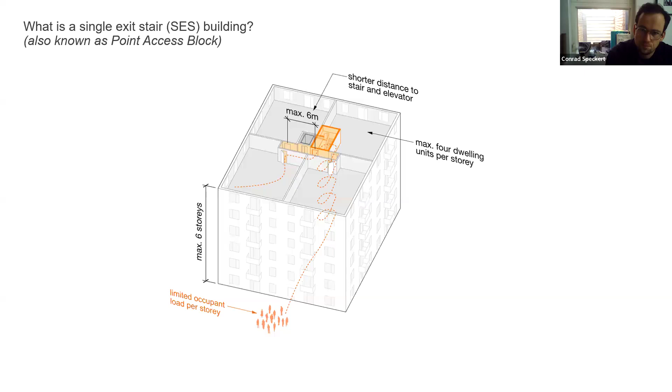When we compare that to what we typically see, I mean, I live in downtown Toronto, in the urban context across Canada. We're very familiar with the efficiency of a double-loaded corridor apartment building. Except for on the corners, the dwelling units in between are, we call them, shoe boxes. We've got borrowed light bedrooms, windows on one side, which leads to more reliance on mechanical ventilation, less daylighting.

The travel distance in that hallway can be up to 45 meters to one of the two exits. And other than exit capacity, there really is no limit on the number of dwelling units or occupant load on each floor.

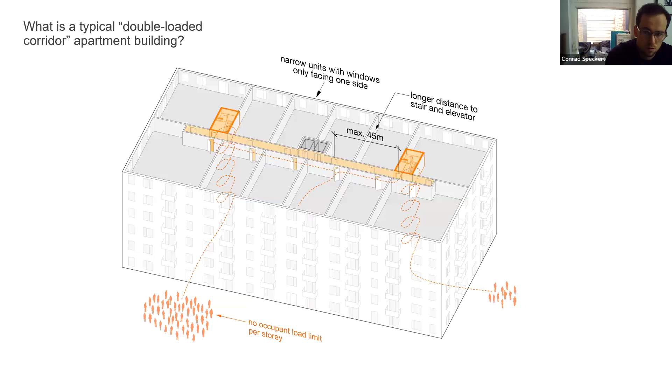And what is the goal of single stair design? So the way I see it is it's three parts and each one leads to the next. When we're talking about the missing middle topic, which I'm assuming all of you are familiar with and have heard ad nauseam, it obviously makes missing middle housing easier to build. That leads to making the development of smaller sites feasible, things like orphaned lots, narrow lots.

And that also changes not just what we build and how we build, but it changes who is building, because it enables development of small scale housing by people that we might call citizen developers. These are the types of developers that don't have the large amounts of capital and time that's required to go with land assembly and to pursue high-rise construction.

I could also add a fourth one to this, which is that it changes the carbon emissions profile, both embodied carbon and lifestyle carbon of the people living there, being in a more walkable community and building at a scale where light wood frame and mass timber construction is possible.

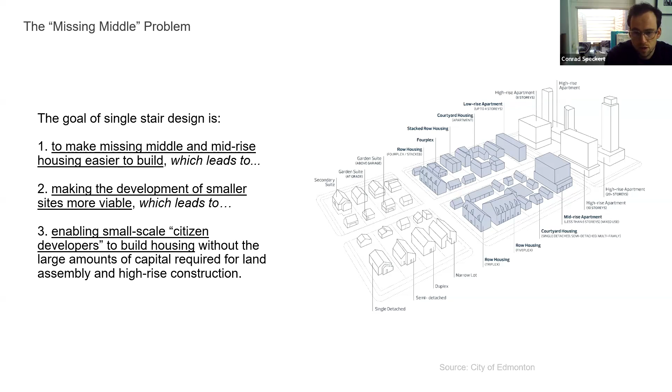Now, of course, one of the major concerns with single stair, and certainly as fire chiefs have described it as removing an exit, is the topic of safety, both fire and life safety in fire emergencies and all types of emergencies. We really have to understand what is permitted by the code, because as we know, in the context of alternative solutions, we're always comparing it to what the minimum level of performance is that's in the code.

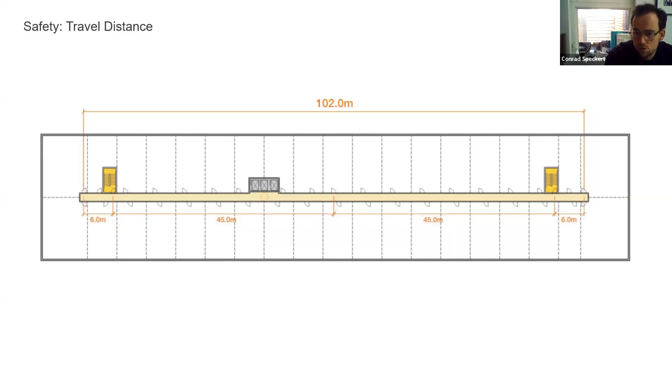And so this diagram, when you look at the variable of travel distance, tells you what the Canadian code determines to be safe. A 45-meter travel distance in a hallway with 6-meter dead ends means you could have a hallway that's up to 102 meters long. In the context of single stair, it would not be possible for the hallway to be more than 12 meters long.

Some Americans down south, realizing that they needed a visual, obviously related to sports, to communicate this concept, and maybe I'll make a version of it with a hockey rink, show the maximum permitted travel distances in the IBC compared to what's permitted in the Seattle Building Code.

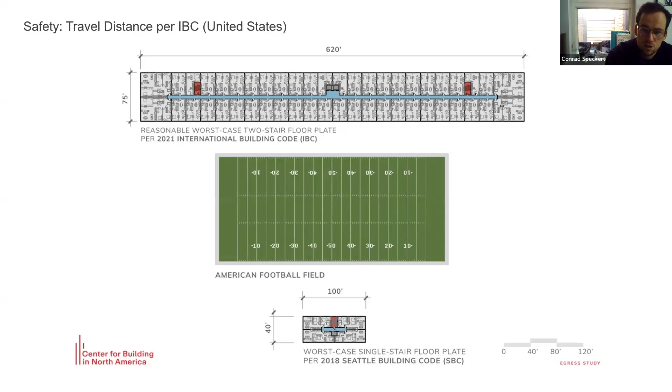And it's a pretty quick, easy way to understand the differences in probability of fires occurring, probability of what we call fire alarm fatigue, because fire alarms are going off often as a nuisance alarm and then people aren't responding to them, the number of kitchens on each floor, etc.

And when we turn to another variable of occupant load, number of dwelling units, the National Building Code tells us to consider occupant load on the basis of exit width. And so for those of you that are familiar with that calculation, in Part 3 of the code for buildings of 4 to 6 stories in height, the code allows you to have up to 275 people per story. That could be up to 137 bedrooms on that floor level, and that's per floor.

When we look at the context of single exit stair and the basis of the code change request that is being looked at the national level, and is similar to some changes I'll talk about in British Columbia and Vancouver, we're not talking about more than 30 people on each floor. And so cumulatively on the 5 upper floors of a 6-story building, that's 150 people. It's just over half of the number of people in the entire building as are permitted on a single story of a 2-staircase building.

And of course, we also are talking about limits on the number of dwelling units per floor, which inherently reduces the number of kitchens, the number of sources of fire ignition.

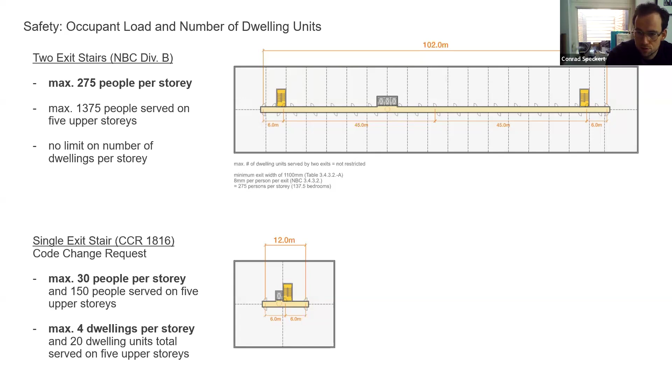But one of the interesting things is if you look at only occupant load and travel distance, you can end up with a very large building area. And so when we're talking about risk assessment and understanding single stair in the context of Canadian buildings of 4 to 6 stories in height, we're often also mindful of being agnostic to construction type. And so what that means is understanding things in the context of it being possible as non-combustible construction or combustible construction or mass timber. The lowest level of performance, of course, being a wood frame building.

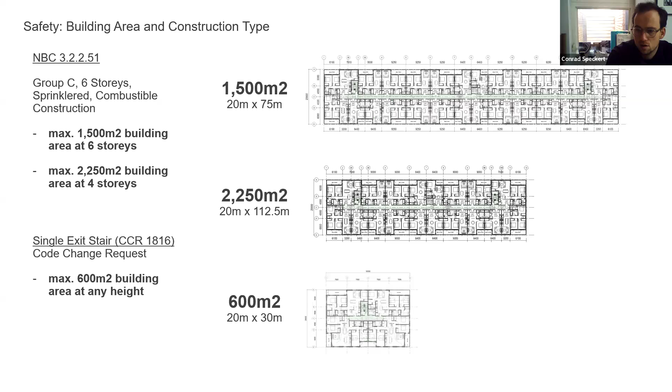Again, comparatively, when you're looking at a single stair building based on the work that's being done at the National Model Code level, it's being discussed at the scale of not more than 600 square meters. And 600 square meters is a very familiar number in the context of small buildings and small building areas.

And zooming out a bit from the numbers and the quantitative side, this is what's kind of interesting about single stairs. When we look at the context of apartment buildings in Canada and North America today, this is what they feel like. When we go into the building, we, from the lobby, see a row of elevators. We go up, we see a long hallway. The exit stairs are not used on a daily basis. The exit stairs tend to be unfamiliar until they're needed. And an apartment building typical floor is pretty indistinguishable from a hotel. So hope that gives a very quick introduction to single stair.

Now we're going to look at a bit of a history of this topic in Canada. So back in 1984, 2 architects put together a report for Canada Mortgage and Housing Corporation, which reviewed fire safety and the design of apartments. They looked at fire statistics in Sweden and Finland, apartment building designs in other parts of the world, what was in the US codes. And the report spoke to the topic of single exit stairs, something that they would recommend for work to be developed in the Canadian context. Of course, that was at a time when the number of apartment buildings we were building, the type of planning policies and land use permissions that existed was very different from today.

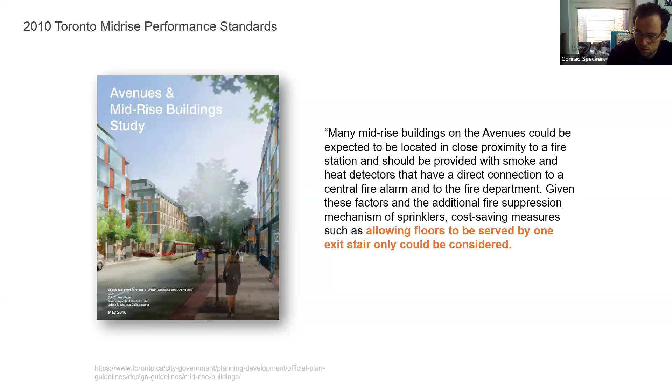More recently, in 2010, when the City of Toronto did its Avenues and Midrise Building Study, in the consultant's report to that, which Brook McIlroy Planning had worked on, there was a recommendation that for many of these buildings, there should be a consideration to allowing single exit stair design. The OAA also in 2019, as part of their report on housing affordability, fortunately only in italics, very faint text, mentioned potential changes to the Ontario Building Code to permit four-story buildings with a single exit.

And then most recently, the report of the Ontario Housing Affordability Task Force back in 2022. One of the items in that document was also to recommend allowing single stair buildings up to 4 stories. It is now 2026. There have not been any provincial consultations or reports published on this topic. And so it's interesting to see what was at least discussed back in 2022.

In other provinces, however, British Columbia moved quite quickly, some might say too quickly, on a process of changing their code in 2024 to allow buildings up to 6 stories.

Vancouver is an interesting case because Vancouver is a chartered city, so it has the ability to write bylaws that contravene provincial and federal legislation. And so Vancouver has its own building bylaw, essentially its own building code.

And Vancouver, on their own pace and with a very thorough consultation process, went and developed permissions for single stair buildings of up to 6 stories with requirements for the exit stair to be an exterior stair that's also protected from the accumulation of ice and snow. And really, it's an excellent solution to address smoke spread in the context of Vancouver's temperate climate.

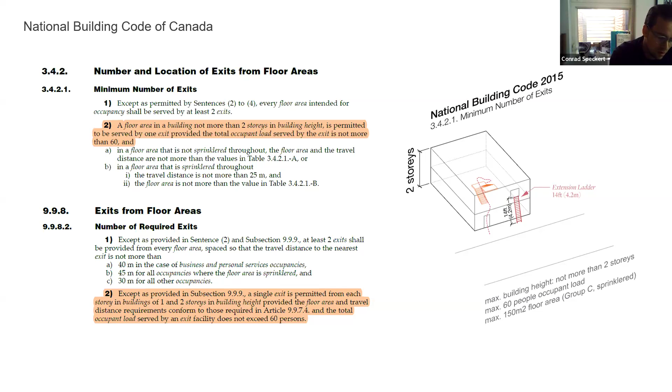And so the National Building Code, both in Part 3 and Part 9, state that a floor area in a building not more than 2 stories in height is permitted to be served by 1 exit, provided the total occupant load is not more than 60 people. As soon as you're over that occupant load, the travel distances, the floor area limits, and the 2-story building height, you're required to provide 2 exits. The only exception to that, of course, as many of us are familiar with, is stacked townhouses, where the staircase is internalized within a dwelling unit.

Just gonna take a sip of water here before I get into the nerdy part.

So, as many of you know, the Ontario Building Code has existed since the 1970s. The first edition of Canada's National Building Code was published in 1941. It was heavily based on a review of permissions in US codes and British codes and documents that were published at the turn of the 20th century.

And this is a very crude analysis, but it just looks at the page count of the PDF of the code. NRC has been very kind to put out an online version of every edition of the code. And what's been interesting is that since the early 2000s, essentially once we digitized things, the length of the PDF itself became not really a barrier to iteration of the code. And so it's on a trajectory towards increasing length and complexity, for better or worse.

Other codes in other jurisdictions put more of the rules and standards in technical guidance references. Some codes like the NFPA 5000 code break things out by occupancy category and building type. And so it's really impossible to make a statement broadly that building code length between different countries results in different outcomes. In every context, it's a different system.

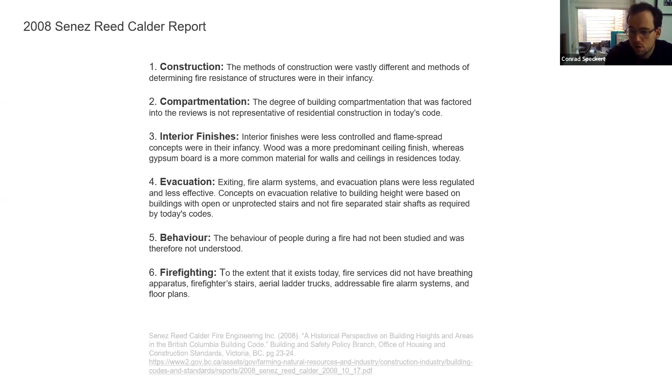So when we look at single stair specifically, back in 1941, the first edition of the code allowed 3 stories and 3,000 square feet in non-combustible construction to be served by a single exit. And this is the part where some architects might fall asleep, but it's just interesting to understand how the code has evolved over time on this topic, and also to understand that as things evolve, we are in a moment in time and the code will continue to evolve.

In 1953, the occupant load limit was introduced and the floor area was cut from 3,000 down to 1,000 square feet. In the 1960s, the code went through a process of developing principles. So principles for the design and means of egress were ingrained to state clearly, almost like what we have today with intent statements, what the intent behind it is.

And one of the principles is that in theory, for any position in a building which might be occupied, it should be possible to travel in 2 directions, since it is unlikely that both will be cut off at once. Ideally, therefore, corridors should have exits at both ends. Now, of course, practically, we have permissions in the code for dead-end corridors. We have permissions in the code for dwelling units to be served by a single egress doorway. And so that principle applies under certain constraints.

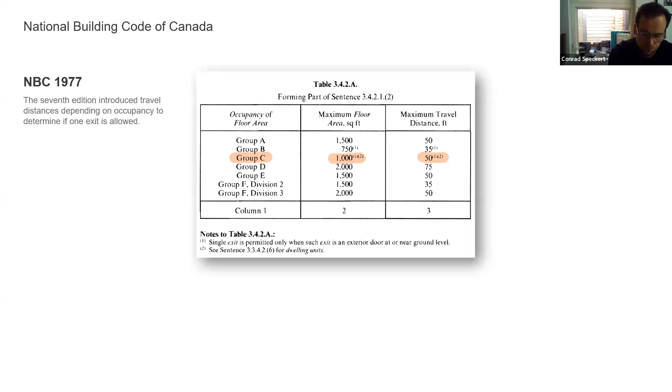In the 1970s, travel distance was introduced. In the 1980s, as a bit of urban infill development started to happen, the code started to develop permissions for 3-story townhouses. This is essentially when the stacked townhouse was invented, because it codified permission for 3-story townhouses with balconies not more than 6 meters above ground level. The code also clarified in the 1980 code that dwelling units in buildings up to 3 stories don't need to have a corridor fire separation, so that the dwelling unit is permitted to open directly into an exit, so long as it has a separate means of egress.

The 11th edition in 1995 subdivided between sprinklered and non-sprinklered floor areas. That's also the year that the national code required sprinklers in any building above 3 stories, something that was later brought into the Ontario Code in 2010. And in 2005, the entire code system went through a process of going from a purely prescriptive code to an objective-based code, which would enable the use of what previously was called equivalencies, now talking about them as alternative solutions, to demonstrate objective-based code compliance. It's not quite the same thing as a performance-based code, but it's a stepping stone towards a performance-based code.

And when we look at the functional statements and objectives, which is always key when you're doing an alternative solution, we can see that the intent is always to limit the probability. To limit the probability relates to risk. Due to hazards caused by persons being delayed in or impeded from moving to a safe place during an emergency, due to risks caused by fire or explosion impacting areas beyond its point of origin, both in terms of persons in or adjacent to the building, but also the building itself. So both property and life.

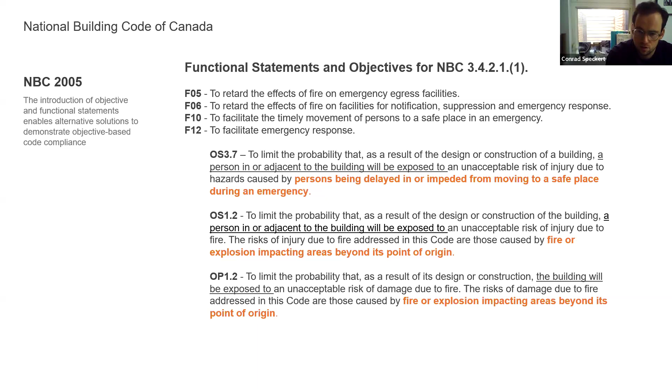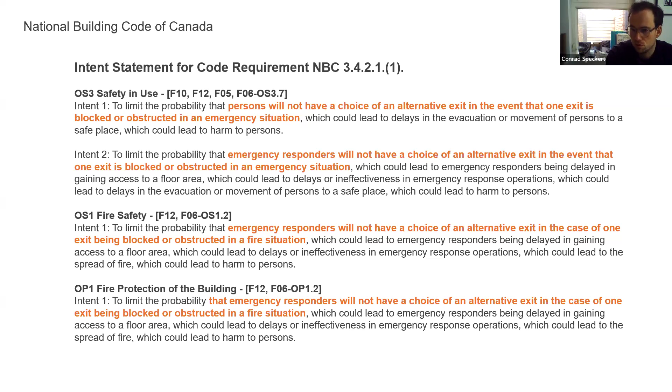What's interesting, of course, is the intent statements that relate to the prescriptive requirement tell us why there was a requirement for 2 exits: to limit the probability that persons will not have a choice of an alternative exit. In each case, that's restated, alternative exit. Of course, the intent statement describes the prescriptive requirement, but the intent statement is not a requirement for an alternative solution, and that's an important distinction to make.

What's also helpful is if we look at some of the other intent statements in the code for permissions where you're allowed to have a single exit, it refers to them as on the basis that the floor area has a limited occupant load, restricted area, and travel distance. And so it's establishing the type of criteria and variables that one should be looking at when one is considering a single exit.

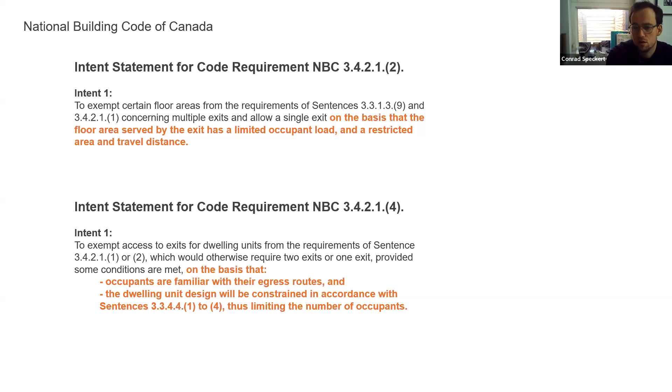Another one also states that single exits would be permitted on the basis that occupants are familiar with their egress routes. Right, so distinguishing between residential buildings like hotels versus dwelling unit apartment buildings. And also speaking to the dwelling unit design itself being constrained, and that's limiting the number of occupants. And so if we constrain the size of a dwelling unit, the travel distances inside a dwelling unit, which the code otherwise does not, that's another piece that the code already speaks to as it relates to the intent. So that's a quick introduction to the history of the code, history of single stair in Canada.

Now we're gonna step out of the country for a second. We'll jump to a few other continents, and then we'll also look south of the border for a bit. So some of you have seen this document. This was some of the work that I was involved in with McGill University, where we look purely at building height prescriptive permissions in codes worldwide. So every available building code that we could source, asking what is the maximum permitted building height for an apartment building with a single exit stair.

Now, one of the criticisms that's very valid of this document is that it doesn't tell you if the buildings are sprinklered, what the construction types are, what the number of dwelling units permitted per story is, all the other variables. It just speaks to building height. And what's interesting is that there's a large convergence of countries that allow mid-rise, 4 to 8 story buildings with a single exit stair. And with the exception of Uganda, Pakistan, and the city of Chicago, Canada is the most restrictive jurisdiction in the entire world.

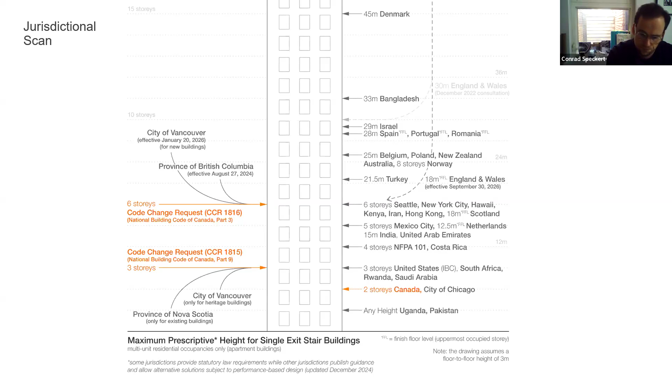There are also some countries, Switzerland, South Korea, and Japan, that have no maximum building height, but simply define the horizontal constraints and permissions as the building height increases.

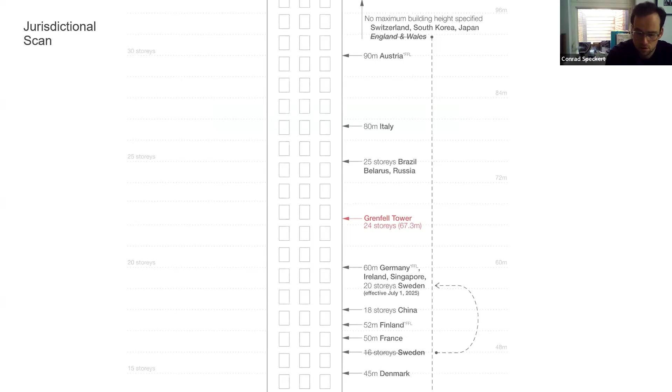Now, one of the ones you'll see on here, of course, is the Grenfell Tower. Many people will mention the Grenfell Tower disaster as a reason to be concerned about single exit stair buildings. For those of you that aren't familiar, the Grenfell Tower is an apartment building that in 2017 was engulfed by the deadliest residential fire in the UK since the Second World War. It cost the lives of 72 people.

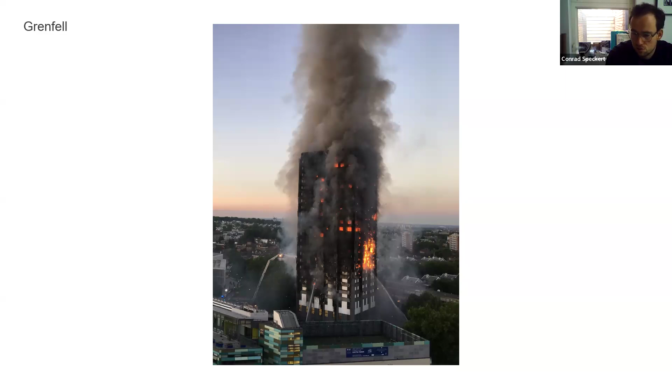High-rise buildings in the UK also have traditionally had a stay-in-place evacuation strategy, which meant that occupants don't evacuate when the fire alarm starts, but are instructed to stay in their unit, partly to avoid overwhelming and crowding the single stair. But in the case of Grenfell, the stay put order lasted for more than 80 minutes from the time of fire department arrival on scene before a general evacuation of the building.

Now, obviously, in a building of this height and scale, a second stair would have helped save lives, would have reduced the need for the stay put policy in the first place. But it's important to distinguish proportionality and that the scale of this building is not representative at all of what's being discussed in the North American context.

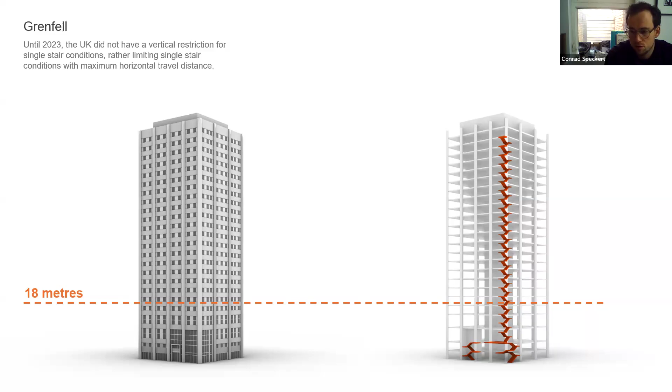And also in response to the Grenfell Tower disaster, the government announced new fire safety requirements applying to all new buildings, sprinklers being required above 11 meters in height, which is very similar to the 4-story context in Canada. And also introducing a maximum building height for single stair buildings in the UK now at effectively 18 meters.

Another jurisdiction that does a good job of diagramming and explaining the rationale and basis of their codes, being very technical and organized people, are the Germans. Germany introduces very clear proportionality and economies of scale for building requirements depending on building height. And so buildings of up to 7 meters, which is the uppermost floor level, so 3 stories, can have a single unprotected exit stair without corridor separation from adjacent floor areas. It also corresponds to the maximum ladder height of a ground ladder.

Once you're going up to 22 meters, the building can have a single unprotected stair, so no corridor separation, if the fire department has an aerial apparatus, there are no overhead utility lines, there's a parking space clearly designated for the building, and the fire department agrees to providing that second means of egress from the fire department ladder. Windows and balconies are placed and coordinated, and all of this is systematically designed for it, which is a fundamentally different context from how we build in North America.

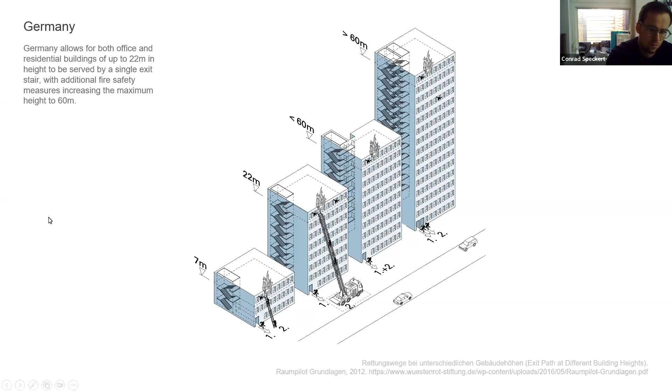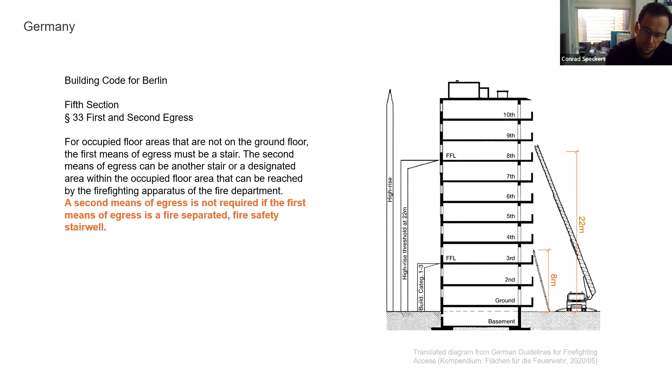And here's just another summary of that and a diagram of it in the context of Berlin. And so again, a second means of egress is not required if the first means of egress is what they call a Sicherheitstreppenraum, a fire-separated fire safety stairwell. Now, one of the examples of these buildings built in 2020 is a mass timber project in Berlin.

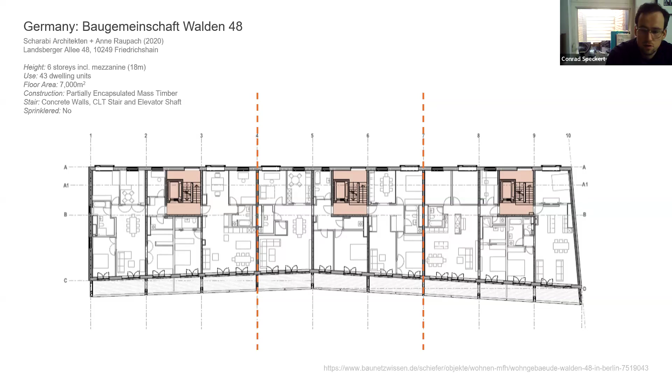What you'll see is there's actually 3 staircases. The building is essentially 3 small buildings separated into 2 dwelling units per story, each served by its own stair and elevator core. One thing I want to highlight is how narrow the building is. The units get daylight from both sides, cross ventilation, so it's quite a livable and desirable floor plan.

I also want to point out it's partially encapsulated mass timber. You can see that about 50% of the walls and ceiling are exposed. The building at 6 stories is not sprinklered, which again is a difference.

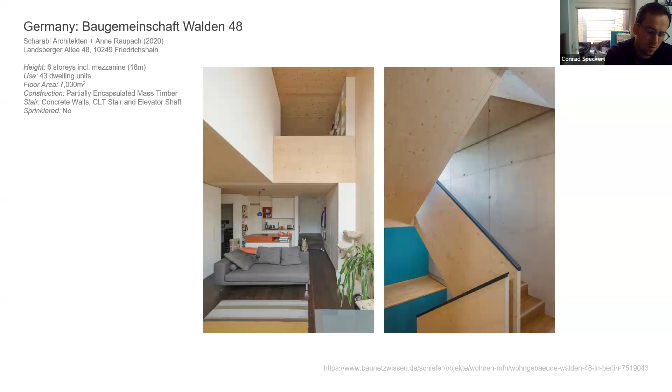Sometimes when we talk about single exit stair, it's pointed out, and it's very true, that in the European context buildings tend to be non-combustible construction, but that's also evolving. In the past few decades, codes around Europe have become performance-based, often agnostic to construction type. Last week I was in a presentation where a fire engineer from Sweden stated that at the mid-rise height, about 30% of their new housing apartment buildings are mass timber, even mass timber with wood frame combination buildings.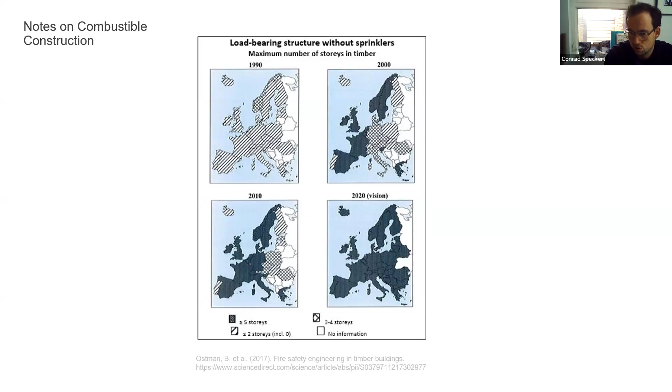And in many cases, at that mid-rise height, they're not sprinklered. Moving to the North American context, I think one reason other countries have flexibility in their code is because there's been a long history of building densely in urban environments. Perhaps one explanation for why we haven't allowed this in Canada is that we don't have a strong cultural and social acceptance of apartment buildings ideologically. The building code is a technical document, but it inevitably has a political underlayer, which is why there are various exemptions for houses.

Certain things tend to feed into it. But even in the North American context, cities in the United States have single stair permissions. New York City has been building this way since the 1930s, essentially since the very first edition of New York's codes. And Seattle developed conditions in the 1970s that have seen hundreds of these 4 to 6 story buildings constructed since.

Here's a few examples: a 6-story building in New York City on a narrow infill lot, a 3-story building in Wyoming, because the IBC code allows single stair up to 3 stories across the entire country, even in a less urban context. A 6-story apartment building in Seattle, and another 3-story in Boston. If you squint at the Boston one, actually, because it's on a sloped site, it's 3 stories with basement parking. I'd probably look at that in Canadian context and say it's a 4-story building.

Seattle's code is an interesting one. It has 14 specific conditions related to single exit stair. About half of these are actually just restating what's permitted and required by the code anyway, but it's restated for clarity. The code language, in summary, states it's for buildings up to 6 stories, not more than 4 dwelling units per story, a travel distance of 20 feet from the suite entry door to the exit, which is the exact same as our 6-meter dead end conditions. 1 hour rated construction, same as what we have in our code for buildings up to 6 stories, sprinklered throughout.

And where an interior stair is provided, the stair shall be pressurized. Again, it's not a recent change, it's something introduced in the 1970s. And it's right now being considered as an optional appendix for the Washington State Code as well, to allow other cities in Washington State to opt in.

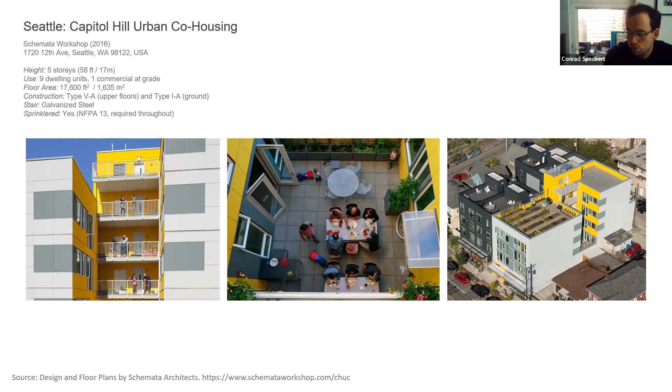Here's a project in Seattle that gives a really good sense of proportions and what these types of buildings can be. In this case, it's on a street where the ground floor is the architect's office. It's a co-housing project, so the architects and designers actually live in one of the units up above. It's a really, frankly, beautiful building.

What I want to point out is the typical floor plan. There's units with cross ventilation from both sides. If we look at this from a smoke spread perspective, the ability for a fire that occurs in any of the dwelling units to spread to the exit stair is approaching zero because it's got an exterior passageway. It's a really intelligent solution for addressing that risk, but also with the courtyard providing better layouts.

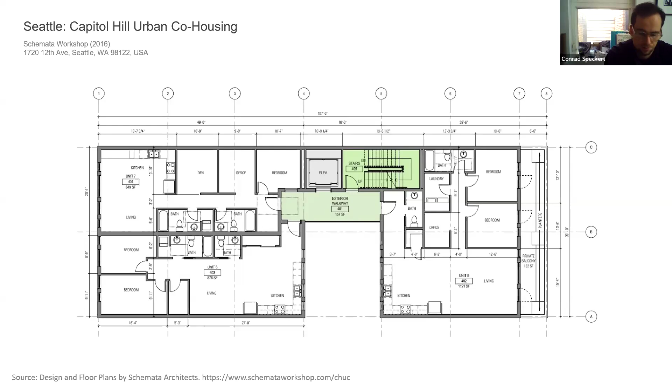Another example in Boston, again that 3-story building with its grade level calculation games. In that case, the buildings again got 3 dwelling units on each floor. In the Canadian and American codes, an elevator is not permitted to open into an exit, so a corridor is provided. If a 3-story building like this one in the US didn't have the elevator, then corridor separation is not required.

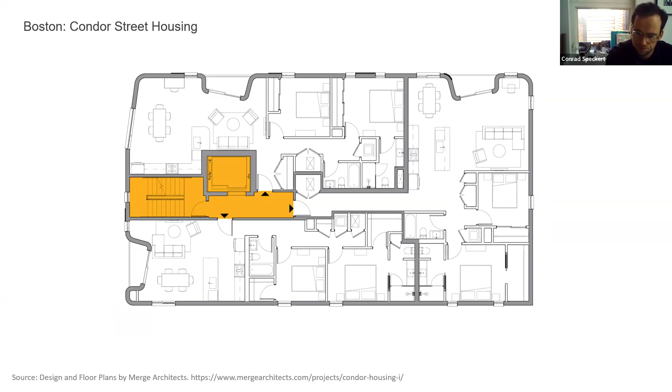Another example, the Wyoming Workforce Housing Project. It's 3 buildings connected on the ground floor, and in this context, the building does not have an elevator. Again, 3 units on each floor open directly into the exit stair. In the US context, if the travel distance is not more than 125 feet, measured all the way down the stair to the exit discharge, then that's permitted.

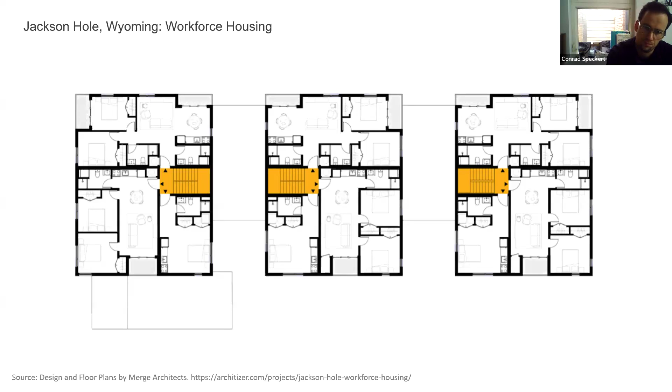Over the past 2 years, a series of 10 pilot projects, prototypes, have been developed to demonstrate the benefit and alternative solutions compliance process for single stair in the Canadian context. This work was supported by the CMHC Housing Supply Challenge and led by LGA Architectural Partners, and it was my pleasure to be the project manager on that work while at LGA.

I invite you all to take a look at the website singlestair.ca. There are a number of reports, fire engineering reports. You can see each of the pilot projects and its status, a summary of the alternative solution conditions. I'd like to point out that alternative solutions do not establish a precedent. They are site specific, each one unique, but helpful to understand what has been permitted elsewhere. You'll also see some interesting cost benefit analysis and embodied carbon analysis there too. So singlestair.ca, if anyone's got 2 monitors and is bored of hearing me talk, feel free to take a deeper dive over there.

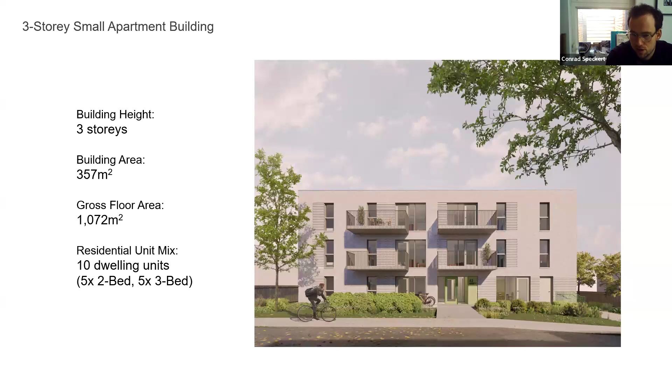One of the projects is a 3-story apartment building, Part 9, building area less than 600 square meters, with 10 dwelling units: 5 2-beds and 5 3-bed units.

What's interesting is that on that particular lot, developers would typically design this as a row of stacked townhouses. We know this because we see it prevalently across the province. In that scenario, in the exact same building footprint, that would look like 4 upper 3-beds and 4 ground floor 1-beds, 8 units essentially, with a whole bunch of internal staircases inside each unit. The building wouldn't require a fire alarm system because there are not enough units sharing an exit, none of them are sharing an exit, and the building also wouldn't be required to be sprinklered.

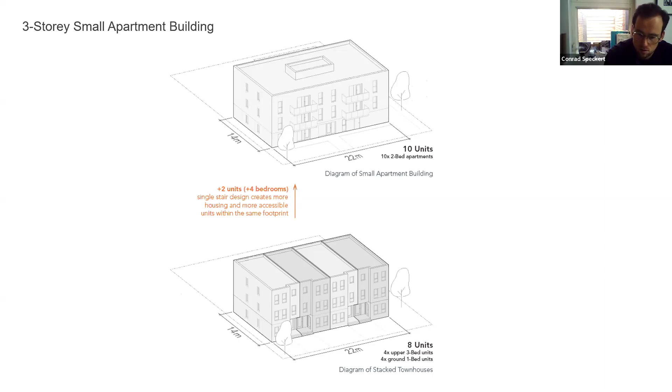Comparatively, in the single exit stair design scenario, you're seeing a 10-unit apartment building, 4 units on each floor, and 2 apartments on the ground floor. In total, the number of bedrooms that fit into that building is 4 extra bedrooms and 2 extra dwelling units. For market developers trying to build and sell, the building at the bottom may make more sense. But for a group like a neighborhood land trust doing a rental building, the apartment building at the top actually makes more sense for their own financial feasibility and financing perspectives.

This is a quick summary of the proposed alternative solution. The building is sprinklered to NFPA 13. NFPA 13 doubles the water discharge rate and also requires any concealed spaces to be protected, so it's a significant upgrade from NFPA 13R.

Again, at this height with 2 stairs, there's no sprinkler requirement. We know that sprinkler systems are upwards of 95% reliable at containing the spread of fire, containing fires to the room, and certainly the suite of origin.

We also look at providing balconies that conform with the OBC area of refuge requirements, sized to provide space for all the occupants of the unit. We're increasing the fire separations to be more durable and reliable, increasing the fire protection rating and the leakage rating—that's like on your car door, putting a gasketing around the edge to prevent smoke from spreading through that dwelling unit door.

What's very interesting in the Canadian context is that dwelling unit doors are allowed to be 20-minute solid wood construction, whereas in other jurisdictions you're seeing doors that are smoke rated and significantly more durable.

We're also addressing the probability of events occurring by limiting the number of dwelling units, the travel distance, and the floor area of each suite, and also increasing the exit width so that if people are going up while someone else is going down, it's significantly wider than the 900 millimeters the code otherwise allows.

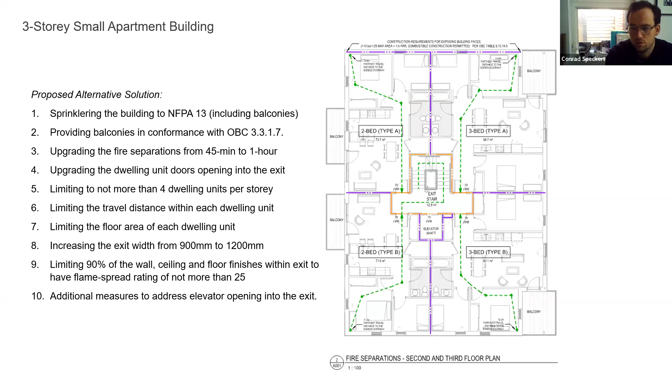Thinking about this not just from a code compliance perspective, but also from a livability piece—this is probably familiar to anyone familiar with single stair buildings in other parts of the world. It goes back to the 1980s CMHC report on this topic, where the architects described that when a stair is directly accessible from the surrounding apartments, it becomes a highly visible and familiar feature that the people who live there know well. They know where it is and where it goes. It's not a mysterious construction at the end of long corridors hidden behind steel doors, and this may be an important safety benefit for both fires and other types of emergencies.

I think that's a really key point: the familiarity between neighbors, the familiarity with the egress facilities, the daily use of the staircase at a 3-story building actually introduces an inherent level of responsibility and comfort with that building design.

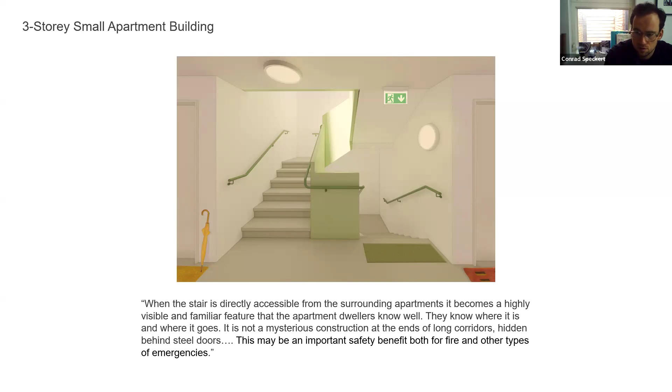So now we're going to look at a few prototypes. A lot of people have asked for something more quantitative—of course, we live in the Western world, so we need to always put data and numbers on everything, we can't trust intuition. So we've tried to empirically quantify the benefit of single stair design for small scale housing.

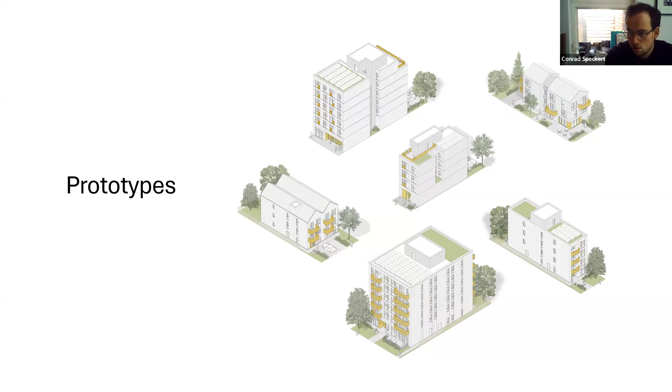What we tried to do was look at small and constrained lots and draw six prototypes at 4, 6, and 3 stories on typical lot sizes across Canada. Having looked at zoning and multiplex permissions, we know lot sizes typically range from 25 to 50 feet. A lot assembly of two 33-foot lots makes 66 feet. So we did a 33-foot wide lot with side yard setbacks, a 25-foot wide lot prototype on a main street condition with no side yard setbacks, and a couple of others, really trying to capture the full range of major streets and neighborhood conditions we might see in urban areas across the country. For each one, we designed a single stair design and overlaid onto it what prescriptive code compliance would require.

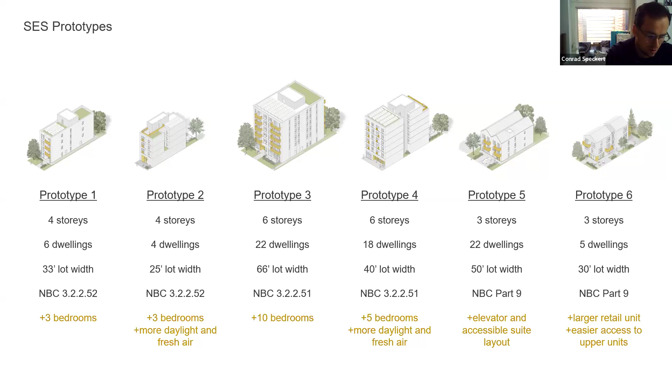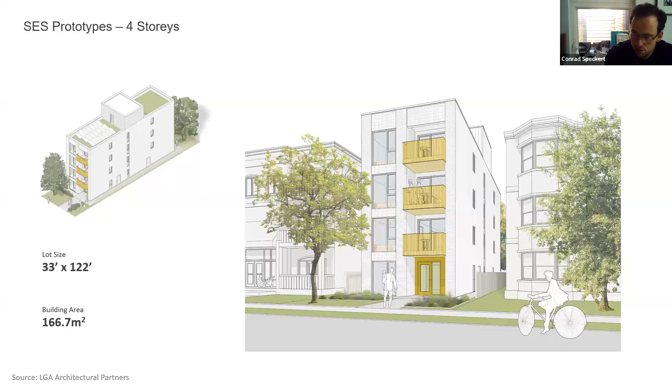I'll point out two of them at the 4 and 6 story range. This one is on a 33-foot wide lot—if you're in Alberta or lower BC mainland, 33-foot wide lots tend to be how things were configured. The building area is quite small. In that floor plan, the building is required at 4 stories to have a stretcher-sized elevator. There are 2 two-bedroom units on each floor, and corridor separation is provided because we're above the height at which a ground ladder and use of balconies as area of refuge would be possible.

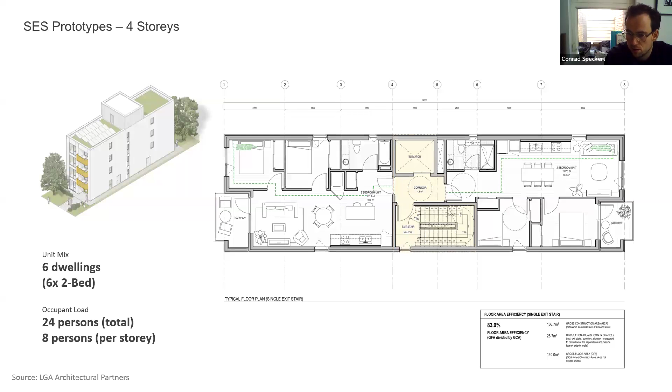When we overlay the prescriptive NBC code requirements, we see a change in floor area efficiency of 10.5%. When we run a rental pro forma, we see the scissor stair grows to delete one of the bedrooms—so on each floor, you go from 2 two-bedrooms to a two-bedroom and a one-bedroom. Annualized, at rents for a bedroom around $500-$550, that adds up to a change in pro forma rental income of over $18,000. So even where there may be additional construction costs from increased sprinkler and smoke control requirements, the floor area savings introduce a dramatic change in the financial feasibility of these buildings.

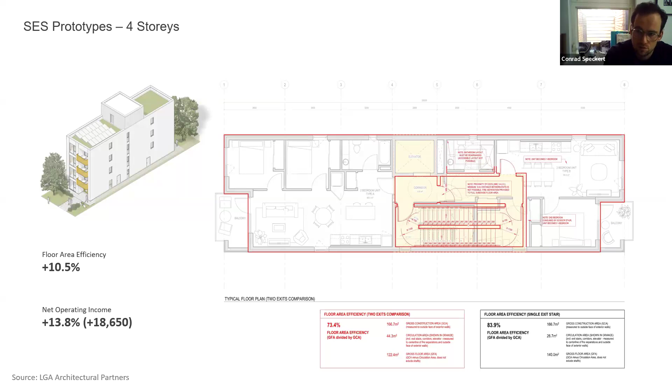One thing to note here as well is the code's familiar 9-meter separation distance between access to exit—so when you're in the hallway, the two stair doors have to be 9 meters apart. But the code actually states there's an exemption from that as long as the floor area is severed or cut in half. So as long as you put a door severing the corridor in half, the 9-meter distance requirement is exempt.

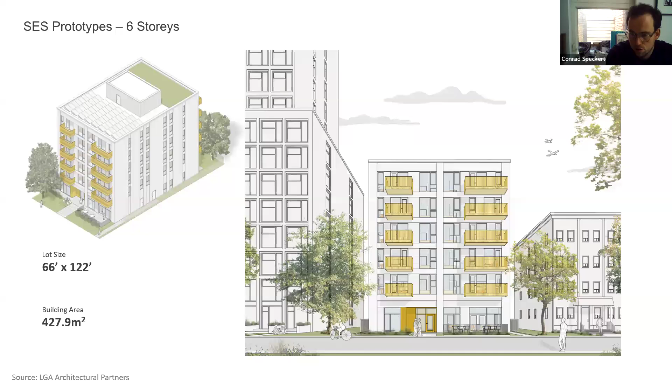Another example of a condition of a wider lot, 66-foot wide, with a bit of a bigger building area as well. In this case, it might be up to 4 units on each floor. Again, extremely reduced travel distances.

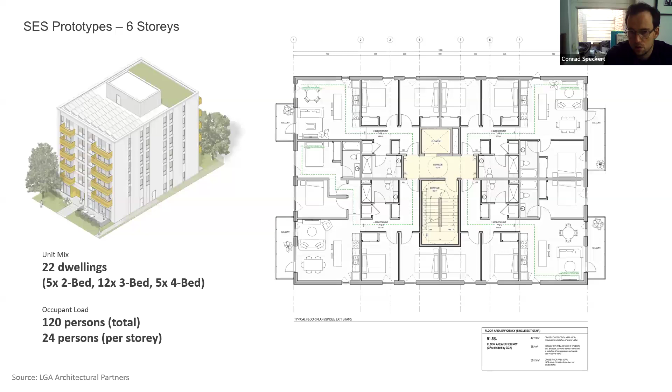A mix here could be 3 or 4 3-beds, or we tried to do a bit of a healthier mix of 1 4-bed, 1 2-bed, and 2 3-beds on each floor. And then again, cumulatively looking at what the occupant load in that building is as well is helpful to point out that in the entire building, it's still quite a low occupant load.

Now, in this scenario with a corridor that does have the 9-meter separation of access to exits, we're still seeing a floor area efficiency change of just under 5%. But in this particular layout, it really impacts the number of bedrooms that you can provide on each floor. And so the net operating income jumps by quite a significant margin.

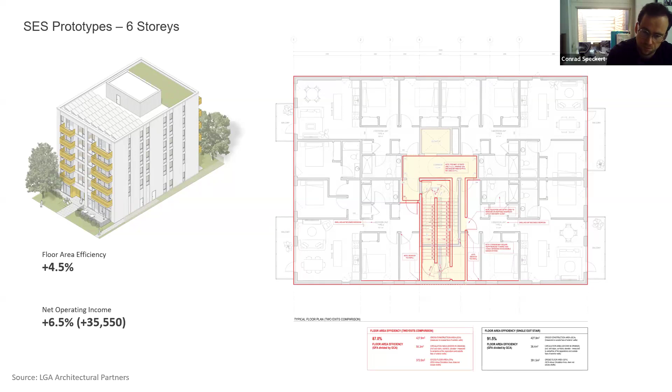And what's interesting to point out when you put these 2 side by side, of course, is one of the buildings was significantly larger than the other. And so there's a perfectly correlated inverse relationship between the bigger a building gets in its floor area or building area, the less impactful single exit stair design is, right?

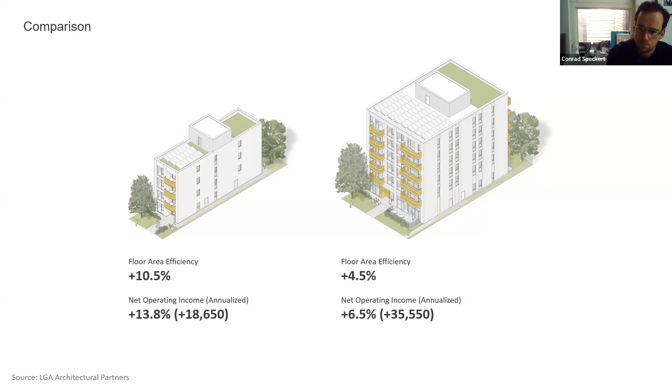One of the other things that actually CMHC through the Housing Supply Challenge has asked us to look at is what the impact at a kind of macroeconomic scale could be of allowing single stair buildings or shifting towards single stair buildings for the small and constrained lots. CMHC obviously has a lot of economists on staff, and so they wanted to see an assessment like that.

With any kind of housing supply projection, there's so many variables that go into that. So I like to call it a bit of voodoo math, so take it with a grain of salt. But I'll walk you through it and just point out that what we calculated was, even though it adds a certain number of extra bedrooms per year as a calculation of housing supply in urban areas,

what really it does is provide architects with design flexibility to choose to use that space for extra bedrooms, or choose to use that space for a light well, choose to use that space to make things more generous. It gives breathing room to do a better building design.

So the order of magnitude impact analysis, and CMHC had asked us to do this for the whole country, but we aren't really familiar with the zoning bylaws and permissions that exist everywhere in Canada. So we looked at just in the context of Toronto, understanding the length of frontage along major streets, and knowing that the major streets permissions exist for 6-story buildings. That gives us a rough sense of how many eligible sites there are based on an average lot width.

If we assume an adoption rate by industry of 0.1%, so 1% every 10 years of the eligible sites being developed as mid-rise buildings, that gives us a number of mid-rise buildings being developed every year or over the next 10 years. And then we know that the footprint of the second stair and corridor tends to be actually close to 20 square meters, but in the most conservative scenario, we took 10 square meters, which is about the footprint of a bedroom.

If the ground floor is a commercial use, that's 5 upper stories. So in the most conservative scenario, we assumed 5 bedrooms per building is the impact of it. It certainly shows a situation where it's actually 10 bedrooms, but again, being conservative in all our assumptions.

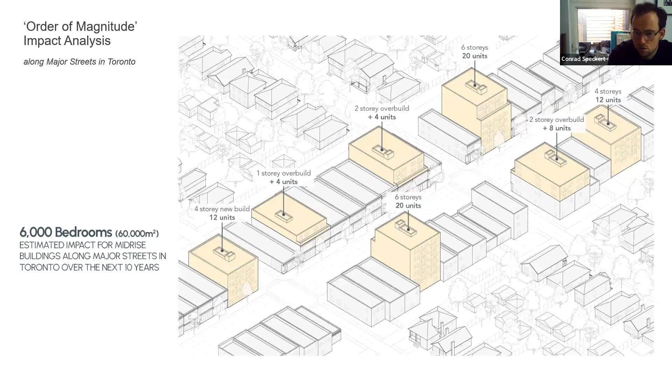And so what that tells us is that over the next 10 years, this change would net just within the city of Toronto on major streets, based on the rate at which these buildings would be constructed, 60,000 square meters of additional usable floor area and 6,000 bedrooms that otherwise wouldn't be provided.

We then also want to look within neighborhoods at the Yellow Belt where multiplexes are being permitted and do a similar methodology. And so taking the number of single detached and semi-detached houses, applying the same adoption rate of 0.1% of sites annually, gives us 3,400 multiplexes being built over the next 10 years. Interestingly, the City of Toronto Planning Department's own intensification study has much higher numbers than this.

I think they're about 10 times higher. Yeah, because it's 87,000 over 30 years. So we're way under on the math.

In that scenario, because you're comparing it to stacked townhouses or scissor stairs without corridors, the solution can sometimes be 3 bedrooms, but often just 1 bedroom of change per building. So again, in the most conservative scenario, that's adding up to a multiplex change in overall housing supply of 3,400

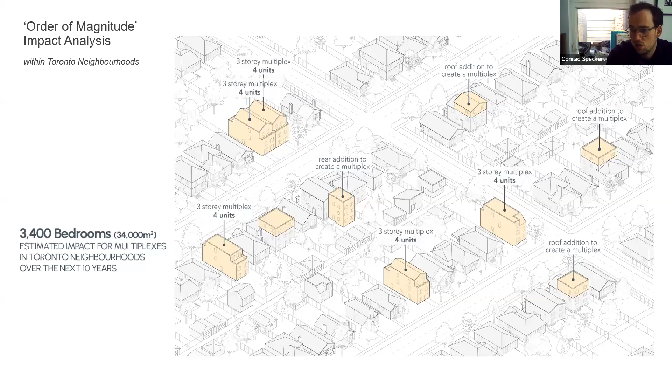bedrooms. So adding that up, again, conservative math on all aspects, we're seeing a net change just in the city of Toronto, just over the next 10 years, that this would yield 3,400 more bedrooms in the city and close to 34,000 square meters in additional usable floor area.

Okay, so we now understand a bit about the history, a bit about what's going on in other parts of the world, and I'll try to talk briefly about code change. One of the things is that because the work of the task group is ongoing, and as a member of the task group, we can't do media on the ongoing work, and all of the work is subject to change. I won't be speaking today specifically to the requested code change or where things are at

because it's an ongoing topic. But you're welcome to email me and happy to chat about alternative solutions and the code process offline. I just can't do media on the topic right now. But I wanted to just walk through the sort of process to understand how this works.

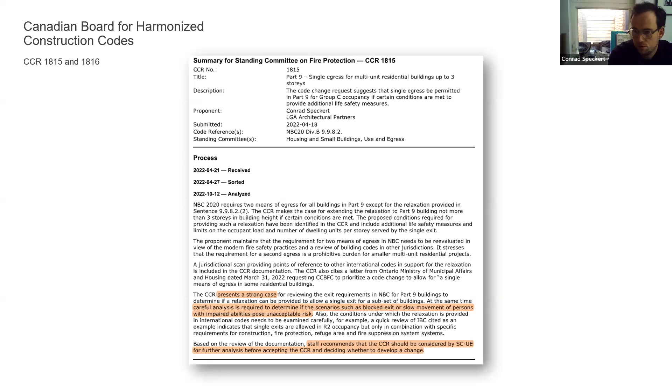So a CCR, a code change request, was submitted by myself and David Hine Engineering, a fire protection engineer some of you may be familiar with, in 2022. The work was then prioritized for the next code cycle. So the National Building Code is developed on a 5-year cycle. It was added to the list of strategic priorities under housing supply and also under fire and life safety for the current code cycle that we're now in.

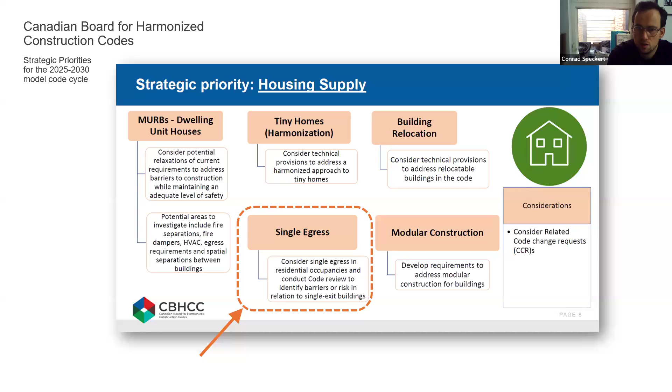Then a task group was created. The task group established sub-working groups to focus on risk assessment, fire service implications, accessibility, building maintenance, ES, environmental scan, which is basically a jurisdictional scan with a great amount of detail into every part of what's required in the other codes, impact analysis, so that's cost benefit, and mixed use considerations. And mixed use consideration means in a building with a single stair serving residential occupancy, are other occupancies also permitted in that building as well.

The task group and the sub-working groups include architects, fire protection engineers, building officials, fire marshals, firefighters, persons with disabilities, researchers, and we work together to establish consensus on proposed changes. Now, I'll just make a note on the topic of risk. A lot of us think sometimes around the building code and requirements of safety as being about absolute risk, right? That anything above 0 is unacceptable.

But the building code very clearly states at the beginning of it that the intent is to limit the probability on a comparative basis. And that is what risk is: the severity of something occurring multiplied by the probability of it. And there's a reason why I highlight this. The NFPA, the National Fire Protection Association in the US, held a symposium for 2 days, specifically on single stair, where they brought together architects, building officials, firefighters, fire chiefs, and regulators from across the US and Canada to talk about this 2 years ago.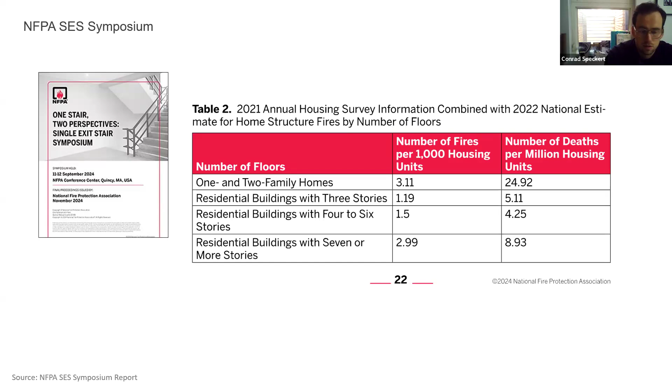And so from a public policy perspective, I feel that this is an absolute win and something that we should be thinking about from a holistic risk perspective. And I mention this also because, of course, the building code makes it very easy in many ways to build houses, but adds a lot of costs and complexities to the construction of small apartment buildings.

And so what's interesting here, of course, is that every time we can replace an old building built to an old code with a new building built to a new code, we dramatically increase the level of performance of our housing stock.